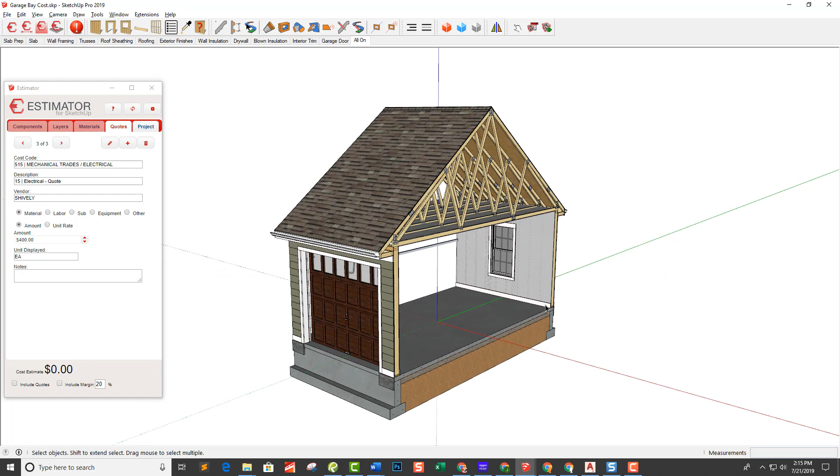So I literally just took a slice, a 12-foot slice out of the garage. It was a 3-car garage before, and so this is essentially a 12 by 24, sort of a typical section of a garage with a garage door and a window in the back, and I trimmed mine out. So this is completely done, and so I'll just kind of walk you through it and show how I was able to show the people how much it would save.

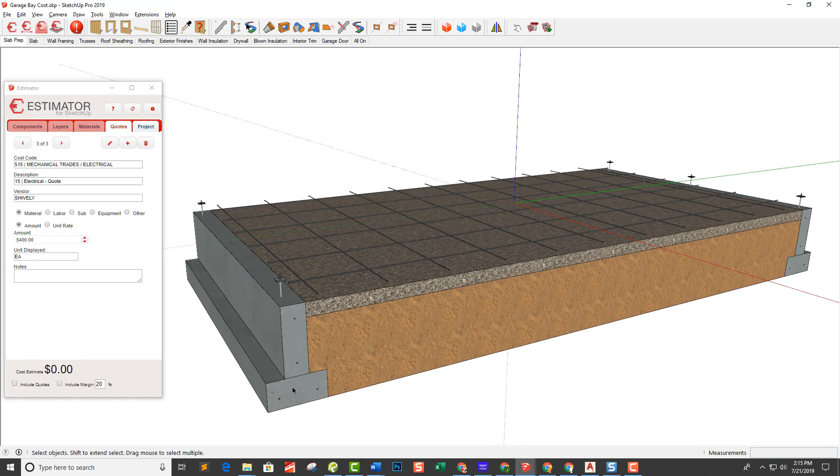So I've got this as the completed section, but we'll start out with the slab prep, just the foundation. In this case, I just used a typical concrete stem wall on a footing. You can see the rebar that's in there. So there's horizontal runs of rebar in both the stem wall and in the footing. And in the stem wall, if I was to, say, for example, cut off that little concrete wall, you can see I've got vertical rebar in there as well.

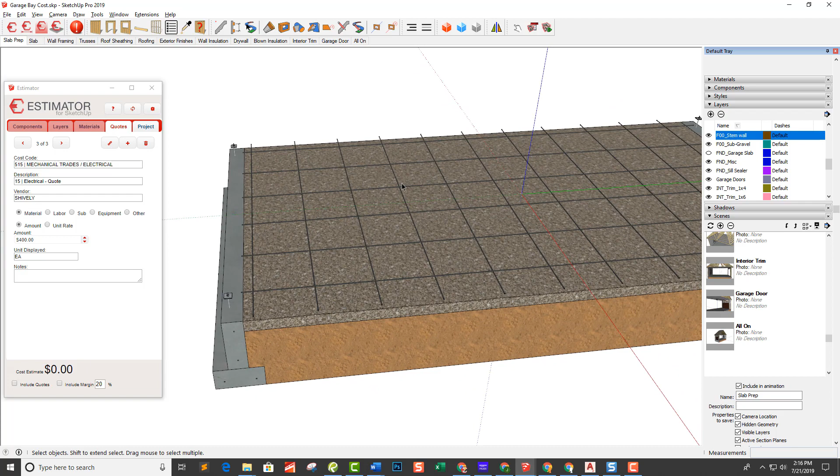And all the rebar was modeled using Profile Builder. And so it's accumulating the lengths as I go inside of Estimator. So a very simple way of getting your good quantities in there, and then you just divide by 20 for how many sticks of rebar. And we'll show you that in a second. So there's our footings, our stem wall, anchor bolts, our sub-foundation gravel, and I put in a little bit for excavation in there for each.

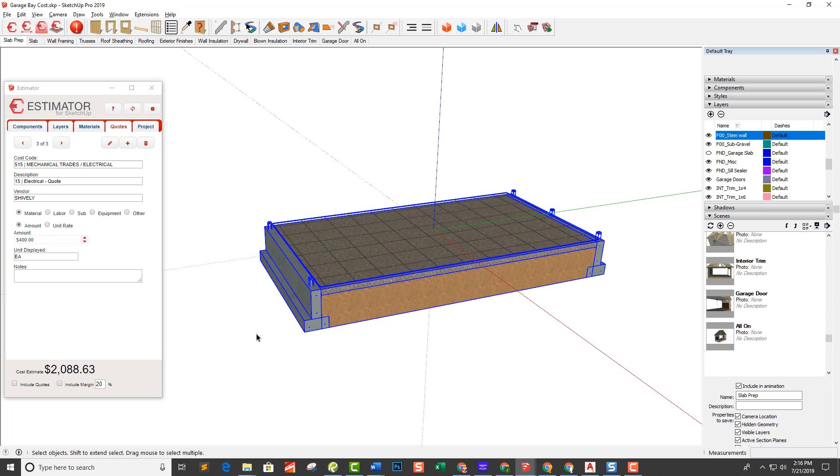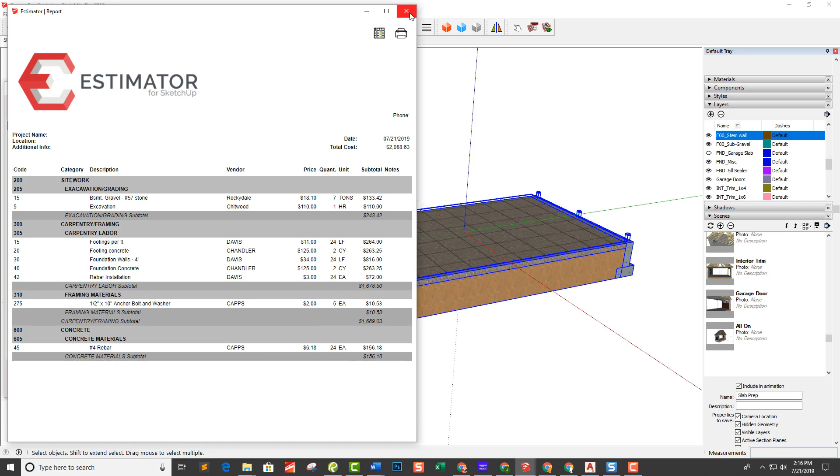So we could quickly pick just this foundation. If I ran a report on that, you see we've got our basement gravel or sub gravel and some excavation time in there, footings both per foot for how much I paid for labor, and then the footing concrete, same for the stem wall, and I paid per stick for rebar installation, and here's all the rebar, and then the anchor bolts. So we're starting to grow this as we go up.

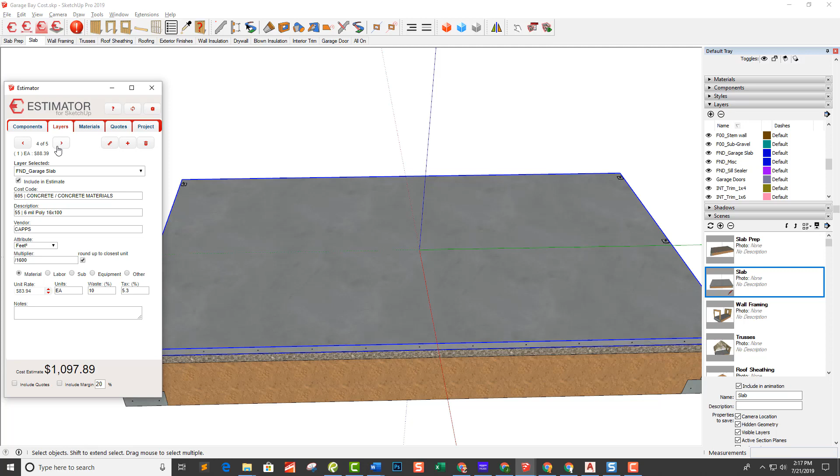Got our slab in there, and in this case I put slabs on layers in Estimator, so you can see I'm getting a bunch of stuff out of that one piece of geometry. I'm using the cubic yards for how many cubic yards of concrete, using the square feet for the finishing labor, using the square feet for the termite treatment that I pay for, using the square feet divided by 1600 for 16 by 100 foot rolls of poly, and forming the slabs. I pay per square foot for that. So that one piece of geometry yields a lot of information.

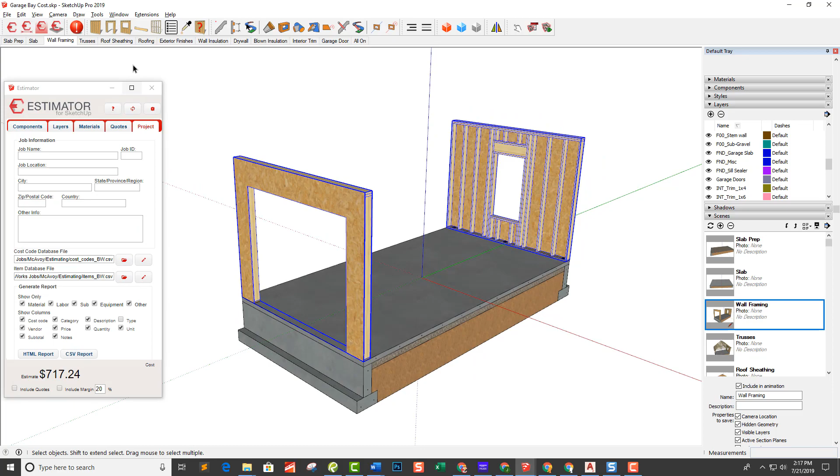And the trusses, I got a price per unit on these trusses. So those trusses, if I look at the components, these are T2s that are $85 each. So we select them all, and there's almost $600 in trusses.

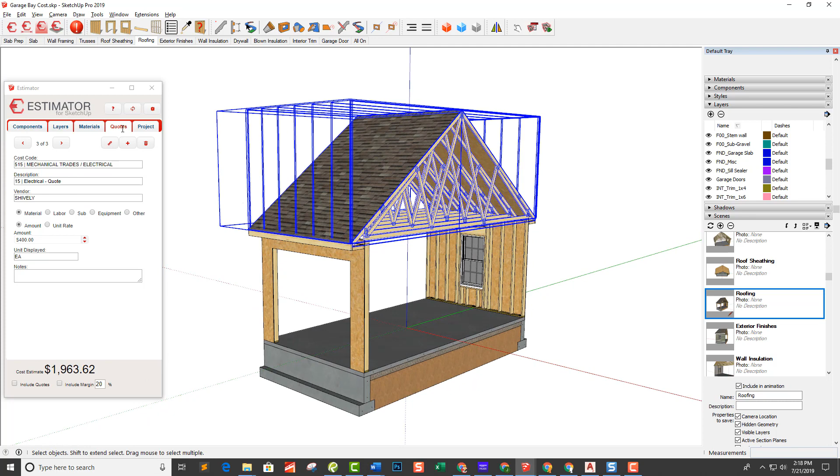Then we put the sheathing on the roof, and of course we have our roofing itself, the shingles, and some ridge vent up there. So if I was to focus on that roof, you can see I'm able to report out the trusses themselves and how much I'm paying the roofer per square for material and for labor. And we've got some ridge vent and some drip edge in there.

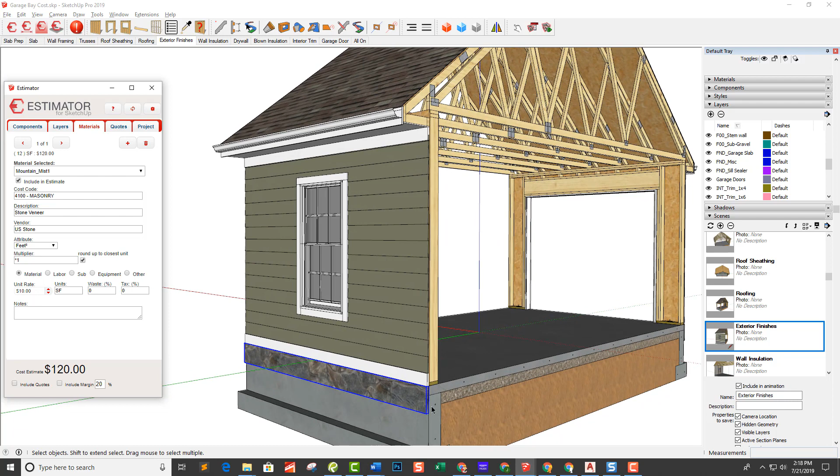And then the next thing I do is I put the exterior finishes on. So in this case, I've got some stone down here that I pay per square foot. And I put that on, I used my materials for that one. So I'm using the quantity, the square footage of this mountain mist stone that I pay $10 a square foot for. Siding, I can report that out in the same case. I'm using a material that's behind that lap siding, and that's showing how many pieces of, excuse me, the smart lap siding.

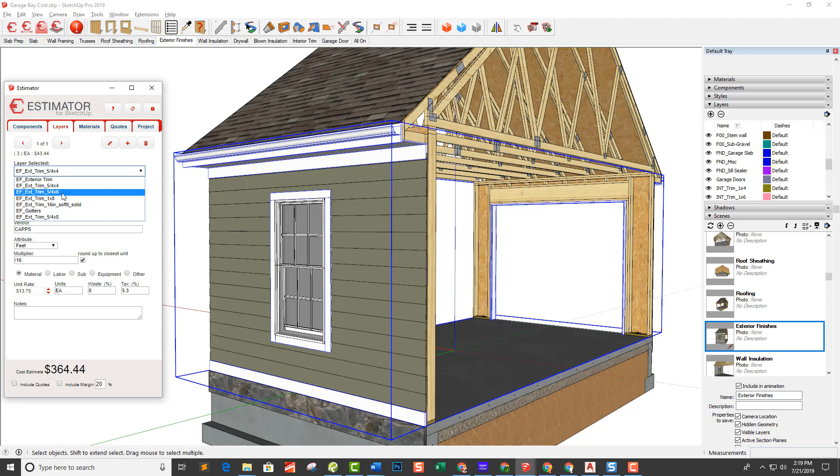My trim, I use Profile Builder once again to do all these individual pieces of trim. I've got 1x8 fascia, I've got the soffit material, I've got a 5/4 by 6 frieze board, band board, 5/4 by 4 trim. So when I use the layers there, you can see all of these layers have different quantities. So I've got my 5/4 by 4, 3 pieces, 5/4 by 6, 1x8 soffit, or fascia.

So I group all those. They're on their own layers, but they're grouped onto my exterior trim layers, so I can cut them easily off and on just with a flick of a little layer here. So I could cut off my exterior trim. Okay.

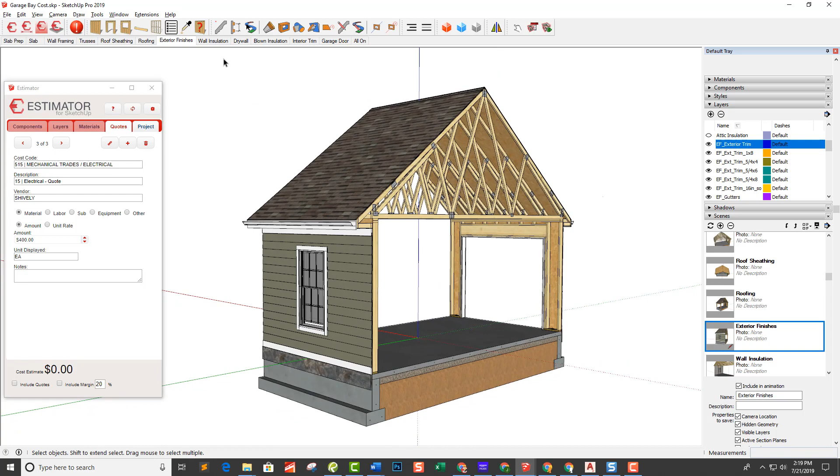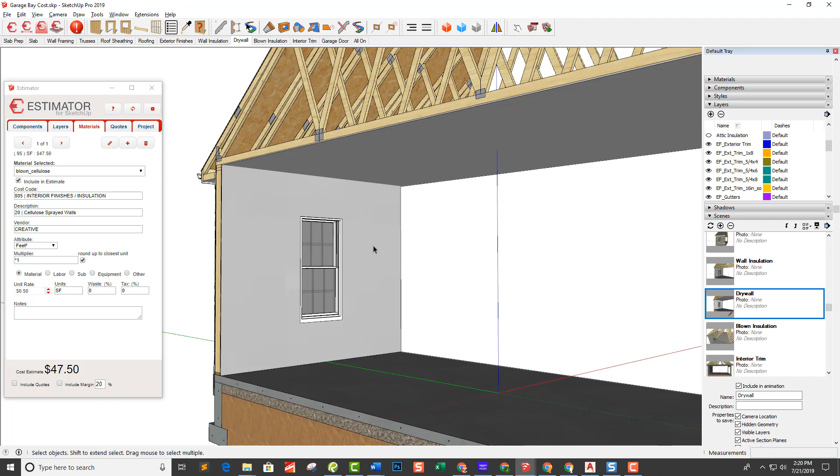So then we'd obviously move inside. We've got wall insulation. In this case, I'm using a blown cellulose in there, and I'm using that material for the cellulose, and so it's only $50 in that wall. After I've insulated the walls, I've got my drywall walls and ceilings, and what Estimator is doing is taking the square footage and dividing by 48 for how many 4x8 or 4x12 sheets of drywall. Of course, we'd blow the insulation into the attic, so I've got a price in there for that.

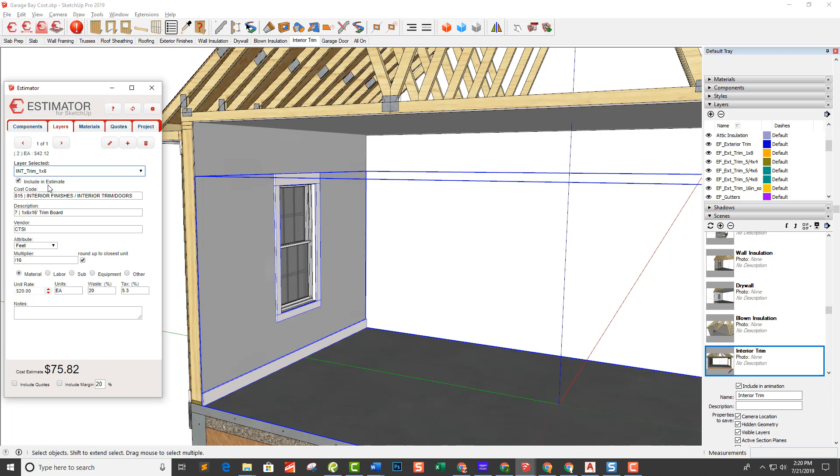For interior trim, we've got these door bucks that go on for the garage doors, which are 2x6s, and we've got our baseboard in there. We've got some 1x4 side and bottom casing and a 1x6 top, 1x6 base. And again, all that's done in a group of grouped layers. So if I was to look at the 1x6, I got 2 pieces of that. 1x4, I need 2 pieces of that. So that's how that's done.

And then the garage door itself is a component. So if I was to click on that and look at my components, it's a $2,000 budget for that door and opener. And then the whole thing, when we select everything that we've got in there, we've got almost $11,000, but we've got some quotes in there. We got a quote from my electrician for how much to allow for that bay. And then that was $400 there, and interior paint, and then the carpentry quote, $2,400.

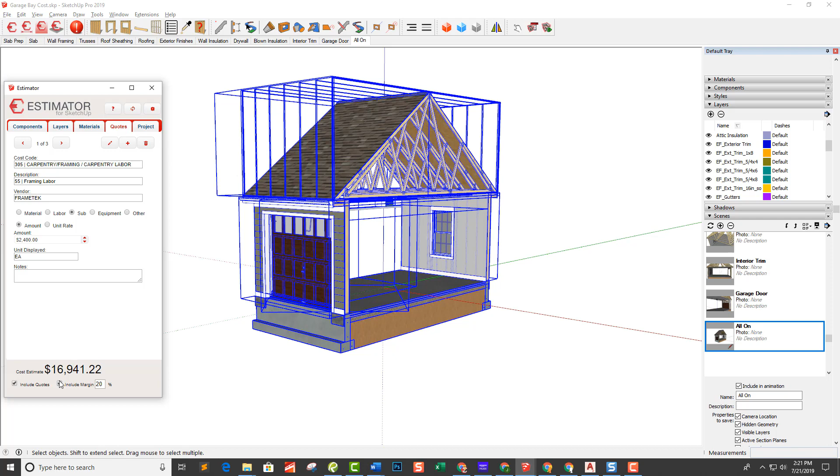So what I do now is include the quotes, but I also include a margin, and you can see that we're up to almost $17,000 for this bay. So a little bit of inflation, I guess, or price increases, and that comes out to being about $60 a square foot, roughly. So there you go. That's how much a bay of a garage, on average, would cost in today's market, anyways, in my market.